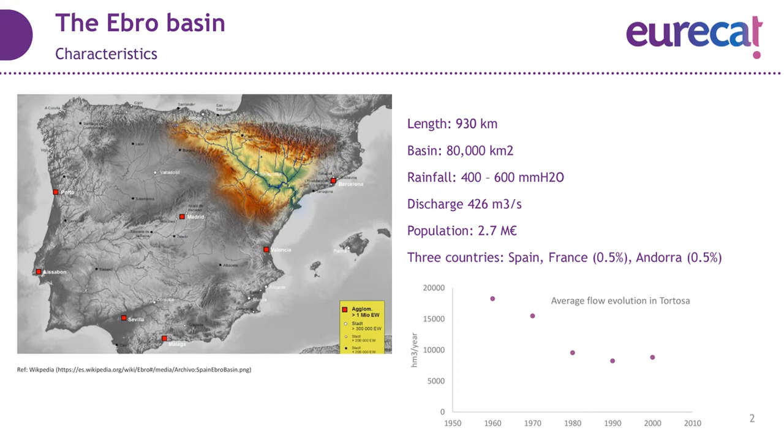And the thing is that this river, in the last decades, its flow, which currently is around 426 cubic meters per second at the discharge, has been decreasing progressively, mainly due to the economic development of the region and the appearance of new complexes and the increasing population in the main urban regions of the basin.

Furthermore, this river discharges in a delta, which is considered a very important nature reserve and a Spanish national park, which is currently facing several environmental threats, most of them related to the amount of water that the river transports. Firstly, the marine erosion. As the basin contains a lot of reservoirs, the transport of sediments is hampered by these reservoirs, so they are not reaching the delta, and then the erosion is progressively eating the land that forms this delta.

The other thing is the saline intrusion. As the flow decreases, the sea enters progressively the aquifer and the areas of the region. So the water at the delta is becoming more and more saline.

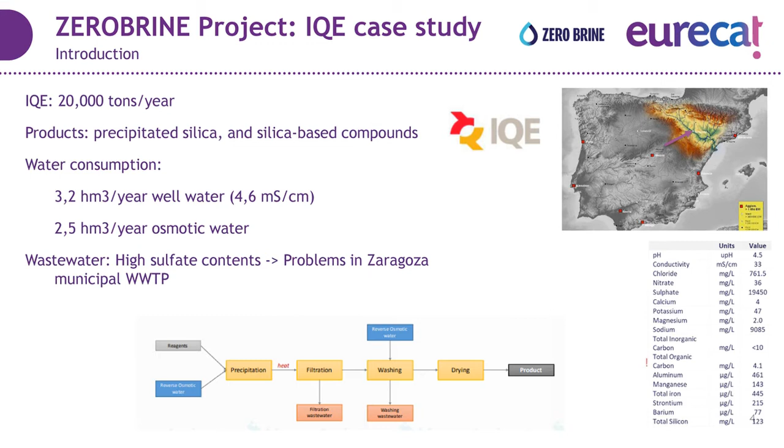So we thought, and we proposed to the company, that we take advantage of this situation, considering that the wastewater only contains or mostly contains sodium sulfate. We can further concentrate this wastewater, thus recovering water and decreasing the total amount that the company abstracts from the wells. And this concentrate from the membrane, the nanofiltration system, try to evaporate it or further crystallize sodium sulfate that could be sold to other companies, so expanding the portfolio of products that the company has.

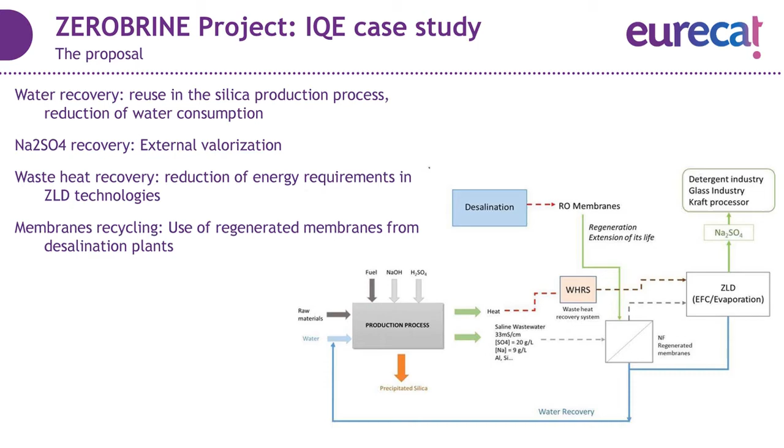So for the past 3 years, we've been studying that at pilot stage, and the conclusions are quite good. So we've reached a very good water quality, as you can see in the concentration stage permeate. We reach a 5 millisiemens quality of water. So this water can be recirculated upstream to the reverse osmosis system, and so it can free water that has been currently abstracted from the wells.

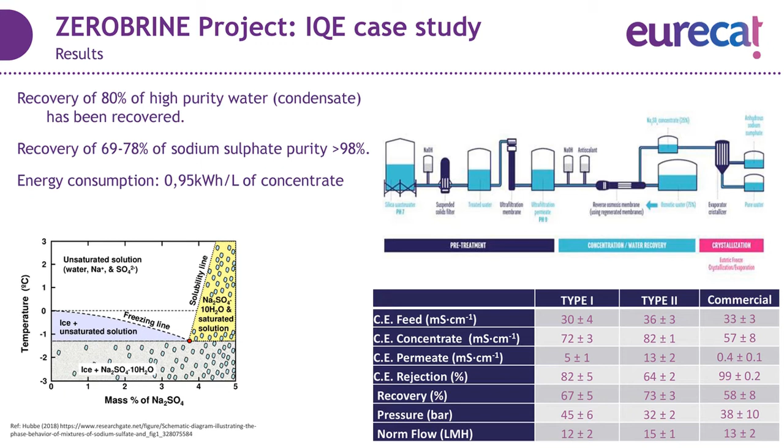And we've been also testing two technologies for the precipitation of the sodium sulfate. One is eutectic freeze crystallization, which takes advantage of the eutectic point, so we can recover quite pure ice, which can be further recovered as water, and a quite pure sodium sulfate solution, and also an advanced evaporation system. And so far, we've been able to recover sodium sulfate of a purity higher than 98%, which is quite good.

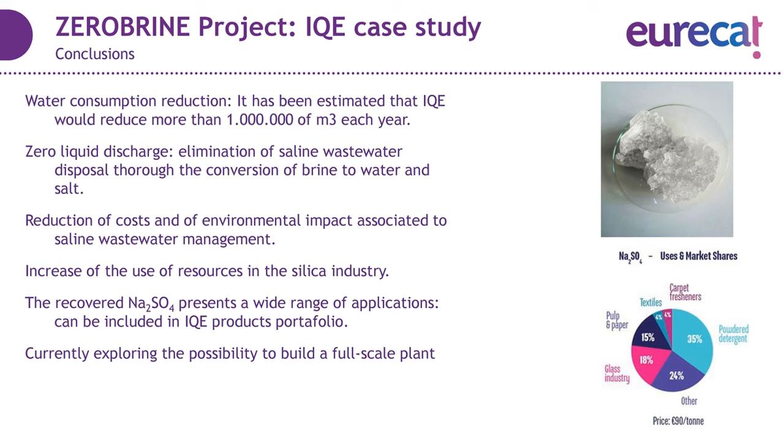So currently the company is considering commissioning the installation of the first concentration stage that will probably be ready by the end of next year, and they are considering options for the recovery of sodium sulfate. And we've calculated that with these implementations, the company would be able to reduce more than a cubic hectometer of water per year, while generating profit from what until now has been considered a waste.

Another case study is taking place in the lower part of the basin in the Tarragona area. This region is not hydrologically in the Ebro basin, but a transfer of water from the Ebro River to this region has been in place for many decades. So effectively, it is also part of the basin, as 94 cubic hectometers per year are transferred from the lower part of the river into this region, where the water is used mostly for urban uses, including tourism.

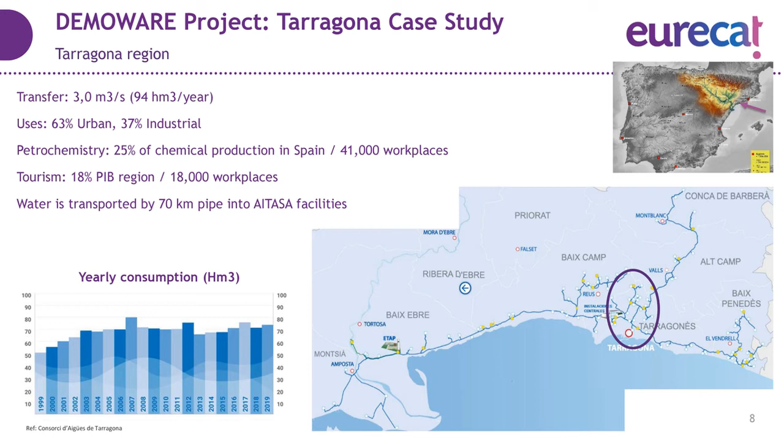This is a very important touristic area, but the water is also used for industrial purposes, because here there's the most important petrochemical complex in southern Europe, which provides work to 41,000 people and produces 25% of the chemical production in Spain. Water is transported by a 70-kilometer long pipe from the Ebro River into Aitasa facilities; Aitasa is the local industrial water operator in the region. So the companies in the petrochemical industry have hired Aitasa to treat and distribute the water.

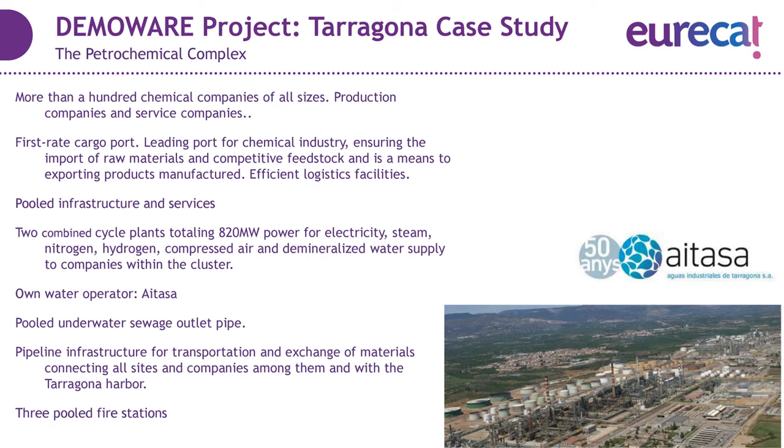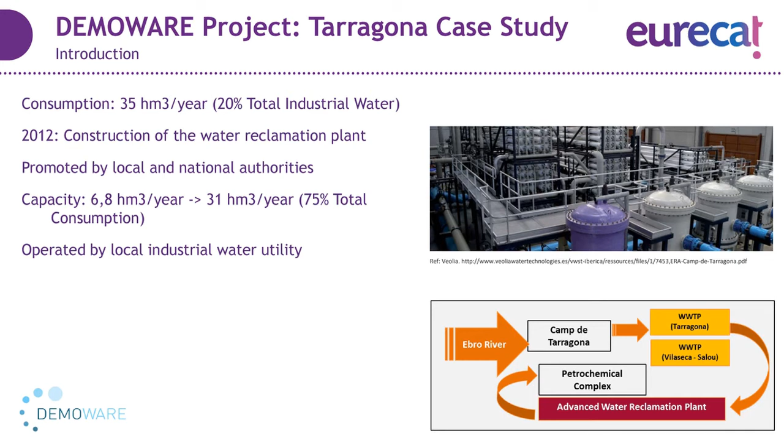Well, here are some facts related to the petrochemical company. I'm not going to go into detail, but to alleviate the water scarcity in the region, the Catalan government decided in 2012 the construction of a water reclamation plant that is fed by the wastewater treated in the Camp de Tarragona, in two urban wastewater treatment plants. So this water reclamation plant treats this water and feeds it into the petrochemical complex.

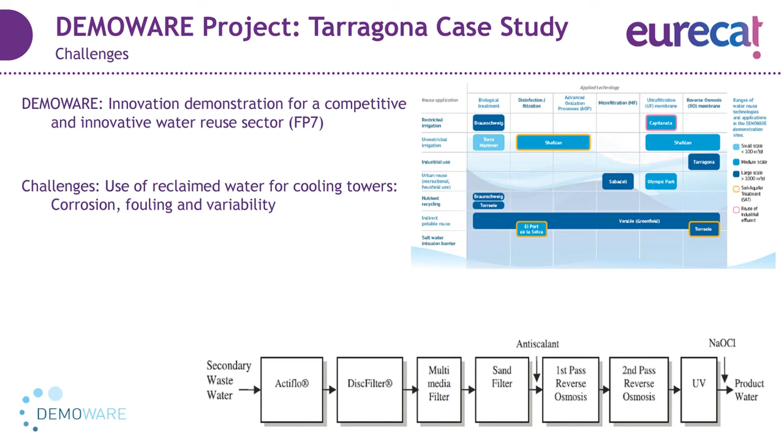In a project funded by the former Seventh Framework Programme of research of the European Union, we've been studying together with Dow Chemical the viability of this water for cooling purposes in a petrochemical plant, mostly devoted to the cracking of ethylene. So the main concerns were corrosion, fouling, and variability of the effluent. The results of the project were quite successful in that the operation was quite stable. That was a full-scale demonstration activity.

So they were able to replace 90% of conventional water, which remember is taken from the Ebro River, with reclaimed water, and that not only led to a decrease in the total freshwater abstraction, but as the quality of the water provided by the reclamation plant was higher than the fresh water from the Ebro River, the company was able to increase the concentration cycles, so they further decreased the total abstraction, and also decreased the total wastewater discharge into their wastewater treatment plant.

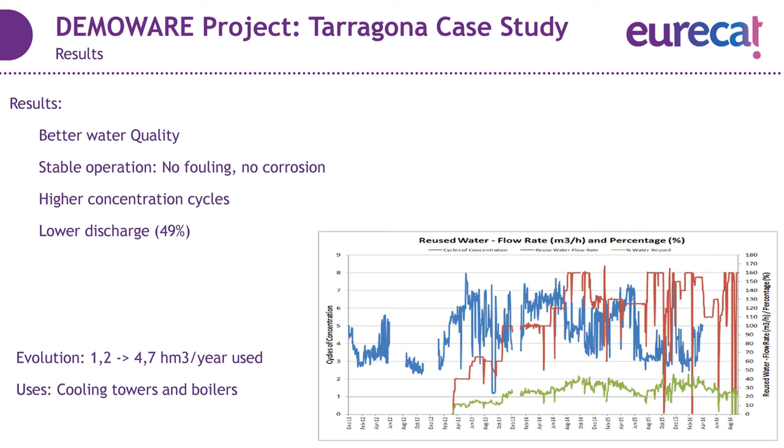So that demonstration was the milestone for the other companies of the petrochemical complex to start using this reclaimed water. At the beginning, in 2012, the reclamation plant was feeding 1.2 cubic hectometers of water to the petrochemical complex, and currently all the reclaimed water is consumed by the petrochemical companies. So the next step, Dow Chemical wanted to go beyond the use of urban reclaimed wastewater, and they started thinking about reclaiming their own wastewater, which is quite complex, as you may see here.

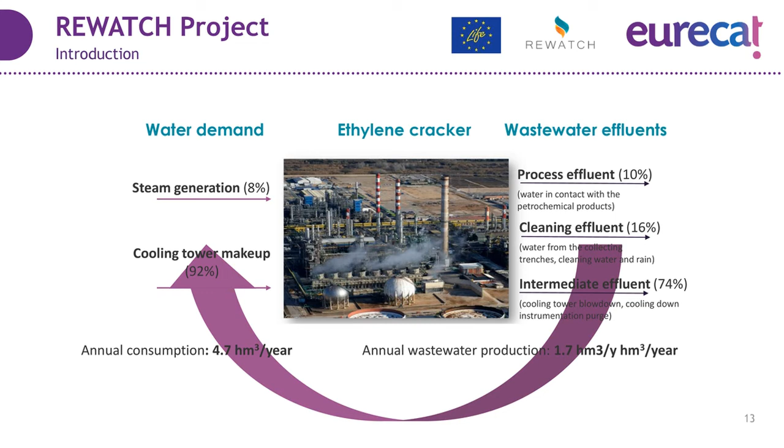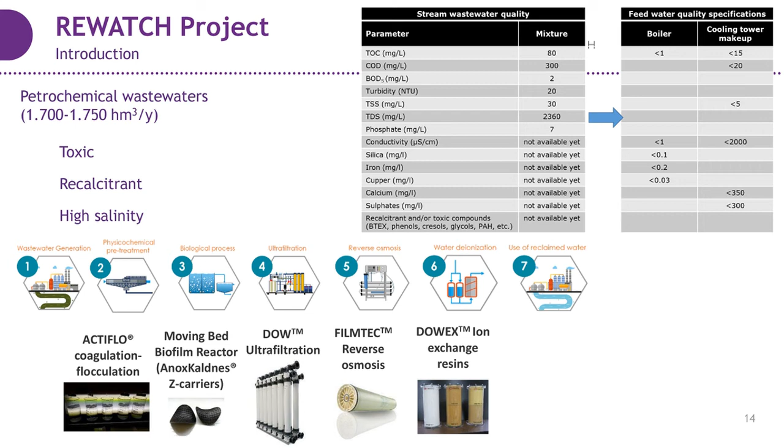The composition, the quality of the wastewater from a petrochemical plant, from an ethylene cracker, is quite complex. As you can see here, it could contain recalcitrant compounds and quite high salinity. So we started a project funded by LIFE, and together with Veolia and Dow Chemical, we developed a treatment train that we've been testing for the past 3 years in order to produce water for the cooling towers and also for the boilers.

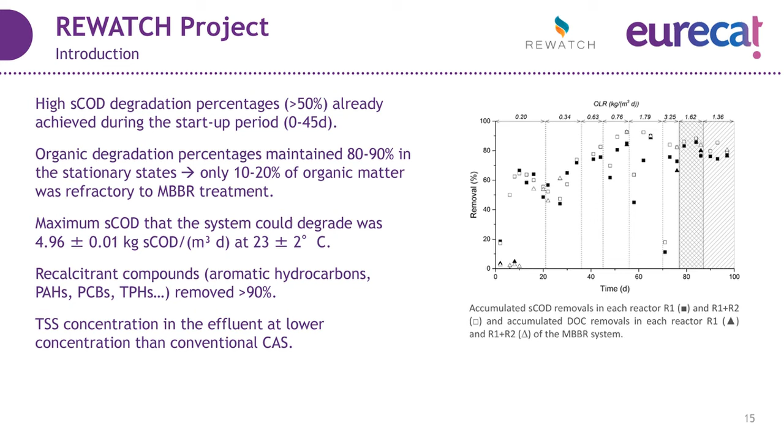We do not have the final results yet, but what we've seen is that using an MBBR, a moving bed biofilm reactor, we were able to achieve high organic degradation percentages, up to 90%, and no toxicity, no inhibition was seen in the biomass used in these biological reactors. Furthermore, we achieved a higher water quality in terms of total suspended solids, which is quite important for the membrane treatment steps that are in the last stage of the recovery systems.

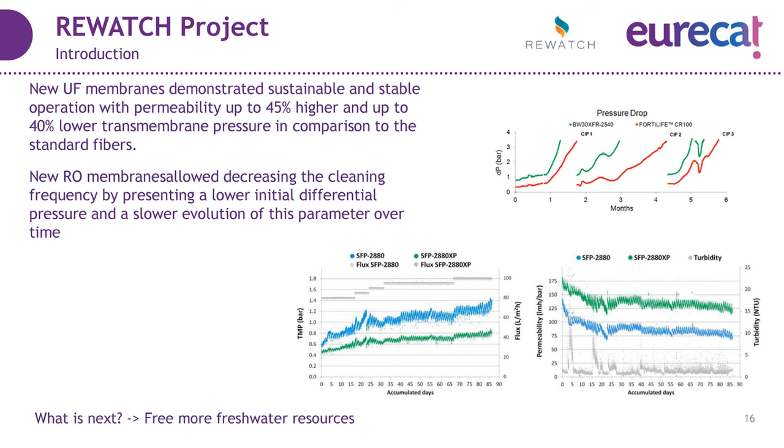We've also been testing new membrane developments that were able to achieve higher permeabilities, so less energy consumption was achieved, and we hope to have the final results by the end of this year.

So beyond that, the whole petrochemical complex is facing a project where they are constructing a centralized and integrated wastewater treatment plant for all the companies in the complex. That's because they need to adapt to the new European legislation and to the new BREF documents, which state that the quality of the water they are discharging into the sea will be improved. This is something that they are already commissioning, so we expect to have this integrated industrial wastewater treatment plant by the end of 2022.

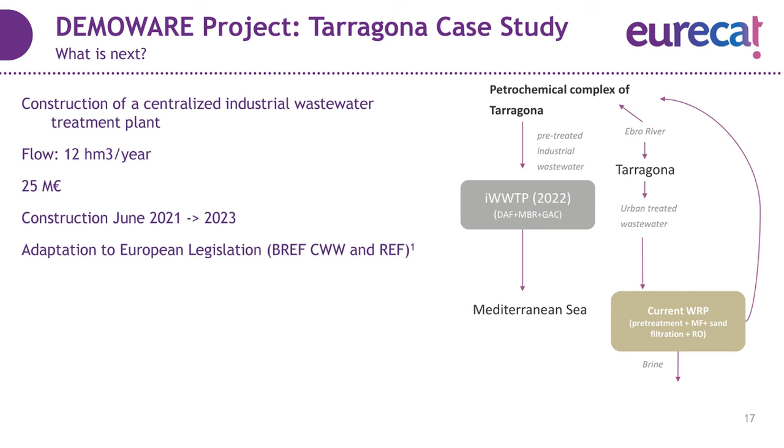But we thought, together with the local water operator and the companies, that it would be interesting to further reclaim water from the brines that are produced in the current water reclamation plant, and try to reclaim the wastewater that will be discharged into the sea by the industrial wastewater treatment plant that will be constructed by 2022.

This will be done in a project that started in the last months. That project is called Ultimate, and we'll try to couple nearly zero liquid discharge systems to further extract water from the brines produced in the existing water reclamation plant, coupled with innovative ammonia removal technologies based on zeolites, and also apply nearly zero liquid discharge technologies, advanced reverse osmosis and membrane distillation, to reclaim water from the industrial wastewater treatment plant that will be in place by the end of 2022.

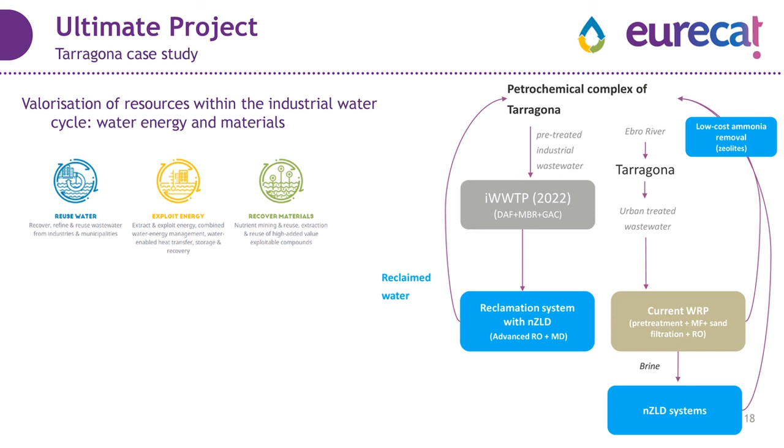So that will be studied in a project called Ultimate, focused on the valorization of resources within the industrial water cycle. Not only water, but also the energy embedded in the water in the form of chemical energy, such as COD, or thermal energy, and also the materials that are embedded in and transported by industrial wastewater, such as nutrients, but also high added value exploitable compounds.